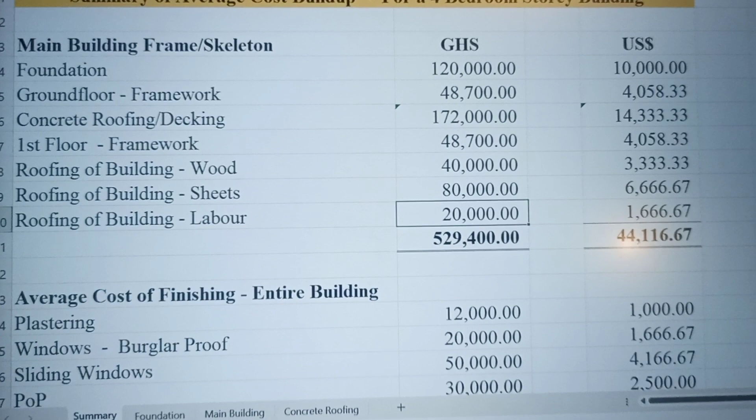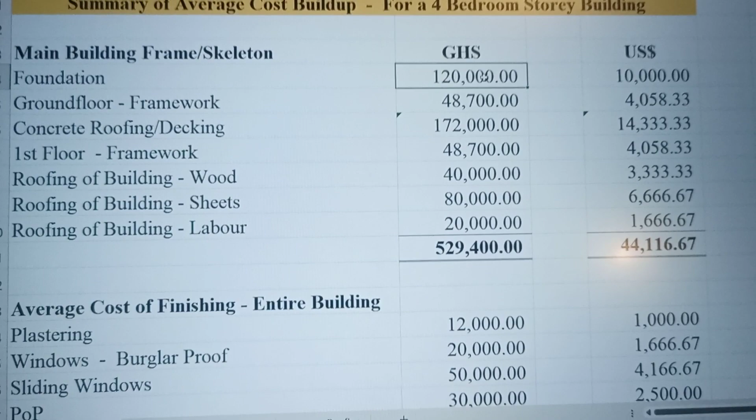Let's go through the spreadsheet. We start with the foundation. Here I have an estimate of 120,000 cedis, which is just about $10,000 using a rate of 12 to 1 to the USD. This foundation is for a two-story, four-bedroom building. Now what goes into that? We'll look at that briefly.

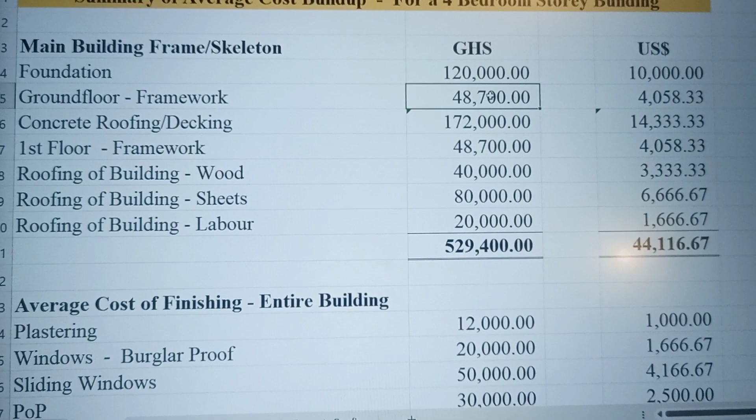Then we also have the ground floor framework. Here we look at the block work. After you are done with the foundation, you do your block work. How much is that going to cost you? As you can see, that is 48,700, just about $4,000.

Then we also have the concrete decking. This is the roof work, where you floor the first floor or the ground floor before you move to the first floor. That is 172,000. We'll look at the details briefly.

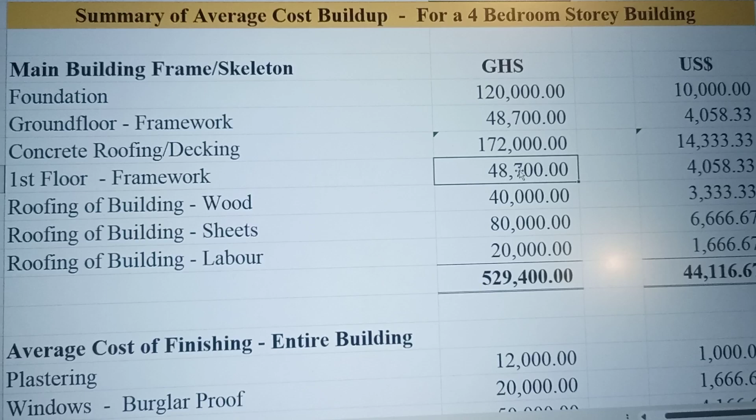Then we have the first floor framework. It's just like when you are doing the ground floor framework, the same thing. It's just the block work you are doing here.

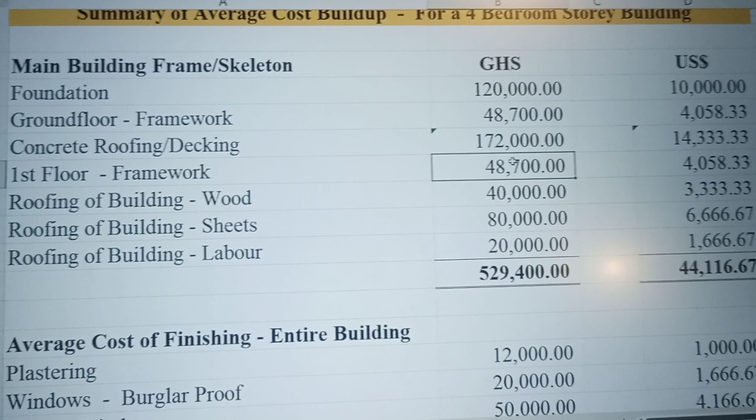Then we have the roofing of the building. This is where you have to pay a lot of attention. Here you buy the wood, you buy the roofing sheets, and then you pay for labor. There are other materials you buy, like nails and stuff. We have lumped everything together, and everything is coming to 529,000, you can round it off to 530,000 Ghana cedis. That is just about $44,000.

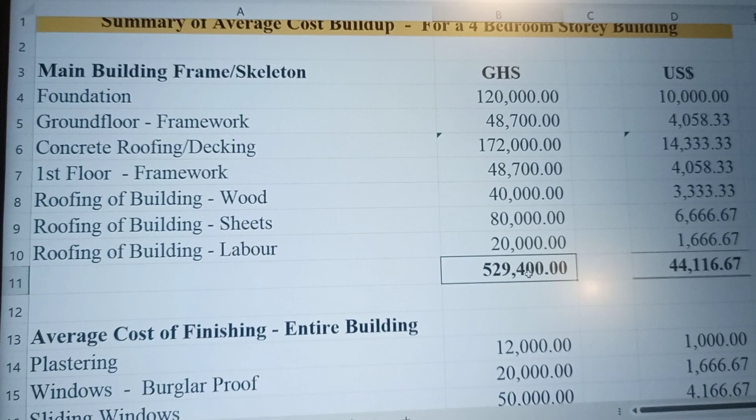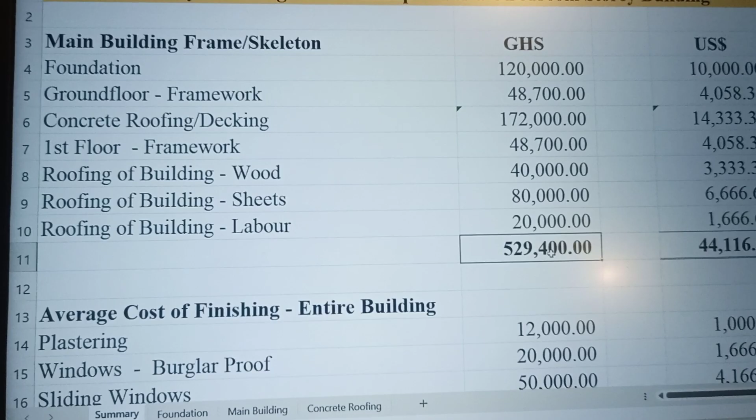So with 529,000 Ghana cedis, it is enough to get you to the framework. At this stage, you can see the building itself there, without the finishing. Let me recap. Here you see the main building standing there, but you will not see the finishing part of it.

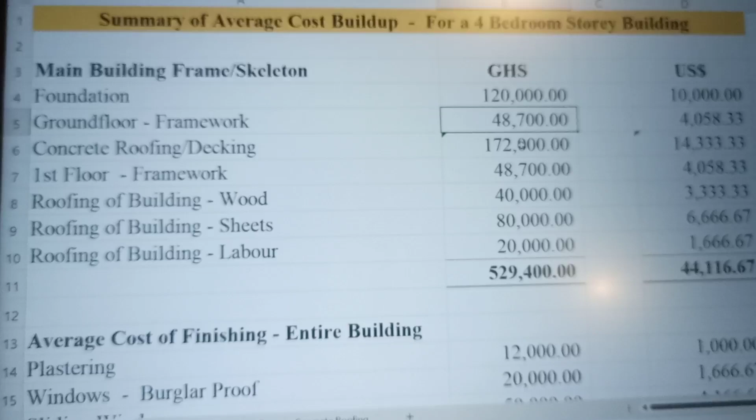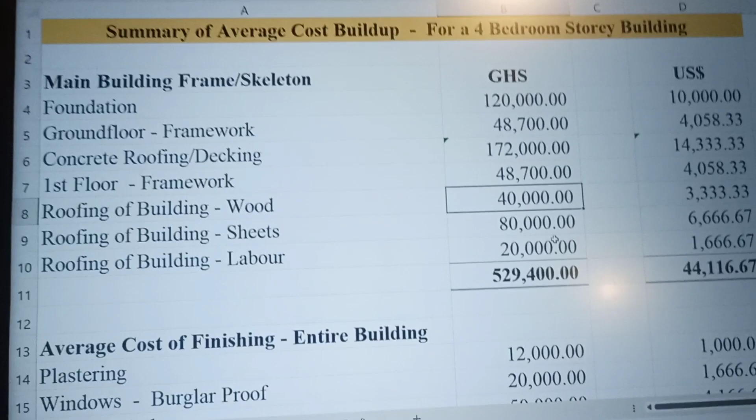So give or take, we have a foundation of 120,000, the block work on the ground floor of 48,700, concrete roofing or decking of 172,000, and the first floor of 48,700. So in case you are not sure and somebody wants to put up the house for you, you have a very good estimate that you can be working with, and make sure you pay attention to it.

So let's go through the foundation. That is what we have here. So the foundation is here. So what goes into the 120,000?

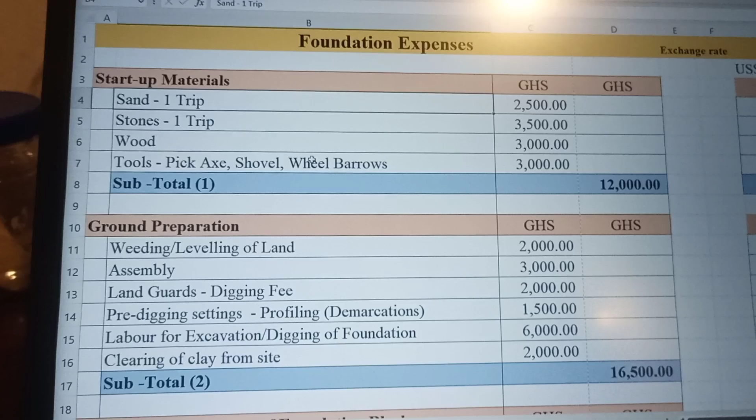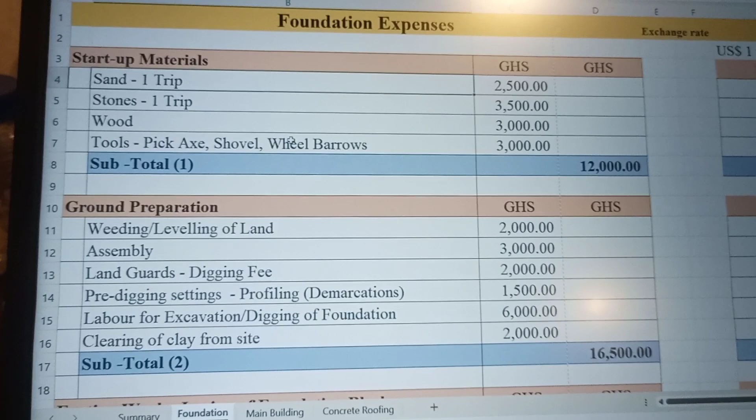As I indicated, when you want to start a building project, you don't need to save a lot of money. You can start with something very small. You don't need to have 50,000 or 100,000 before you start a building project. No, it is a gradual process. A lot of people have gone on retirement without doing anything. All you need is a genuine land, and we will talk about that in detail later.

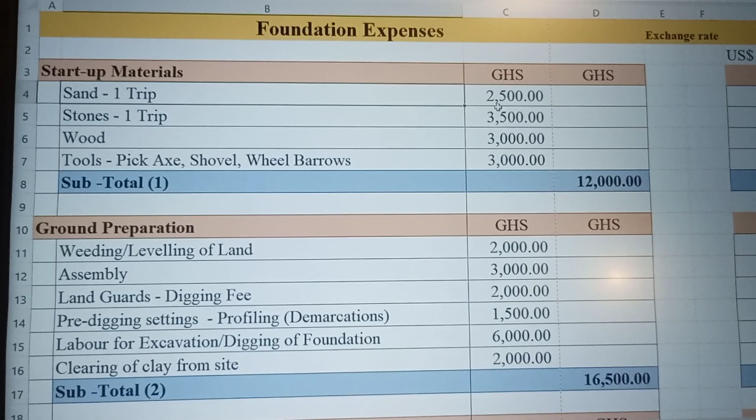Whilst you have the land available—this applies to those who have the land available—what you have to do is make sure you have some sand and stone on site. With 2,500 you can get a trip of sand, and with 2,000 to 3,500 you can get a trip of stone. Then we have wood and tools that you will use to do the digging.

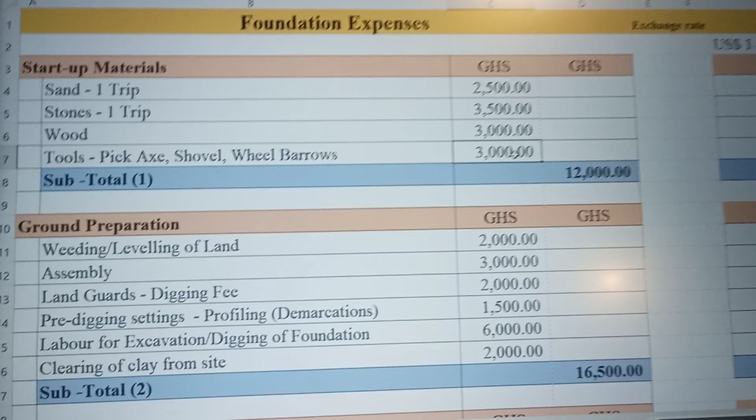Before you start the building, you are going to do digging. You are going to dig the foundation. There's going to be some excavation work, so you need a pickaxe, a shovel, and wheelbarrows. I have estimated that to be 12,000 cedis. If you don't have 12,000 cedis, you don't have to worry at all.

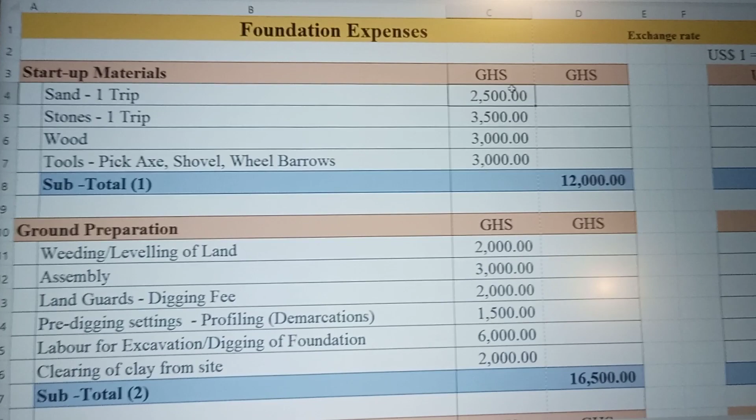All you have to do is buy the sand and the stones and put them on site. Go gather another round of money and then come again and continue. This time you can rent the tools, so instead of spending 3,000 on tools, you can rent them at a cheaper cost. And the wood, you can even rent some of it, since the wood will mainly be used for the profiling. So with 12,000, you are good to go with the startup materials.

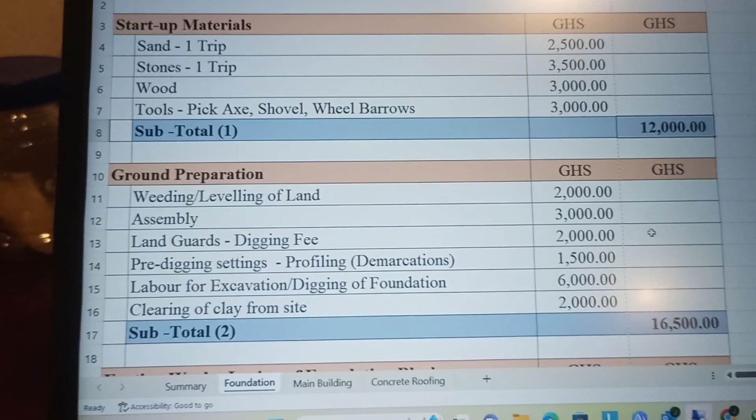Now let's continue. So then we come to the ground preparation. In the ground preparation, we have the weeding or leveling of the land.

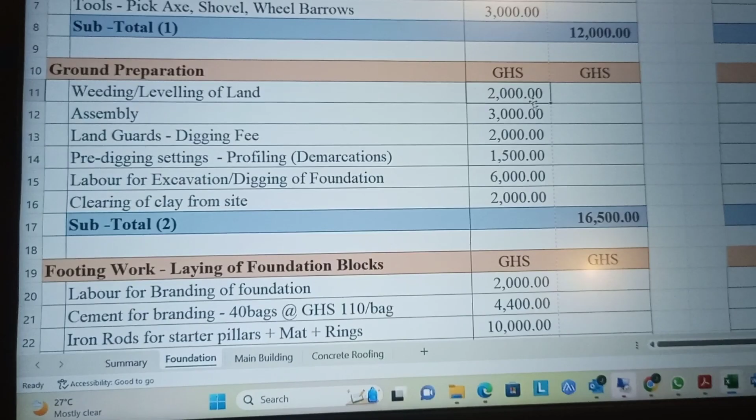So here you are going to get some guys to weed the land or a grader to level the land for you so that it will be easier to do the digging.

Then this is assembly. This is what you pay to the assembly that is in charge of the area. They will give you the building permit, so this money goes to them.

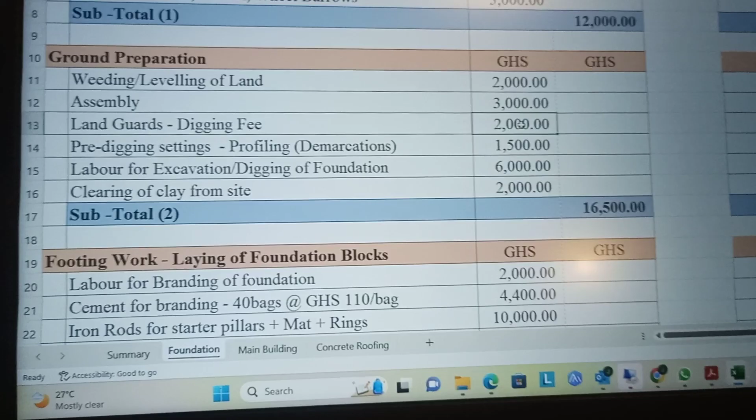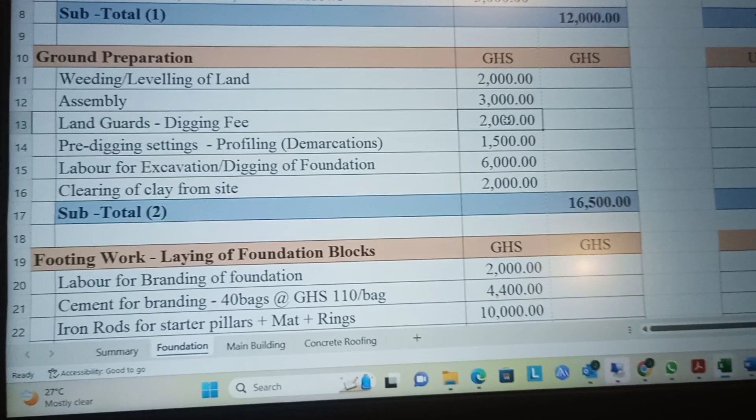Then in Ghana, you realize that there are land guards everywhere, even in areas that are developed. Before you start building, they will come all over you. If you don't sort them out, it will be difficult for you to build. So if you want your peace of mind, you make provision to cover them, and 2,000 cedis should just do that.

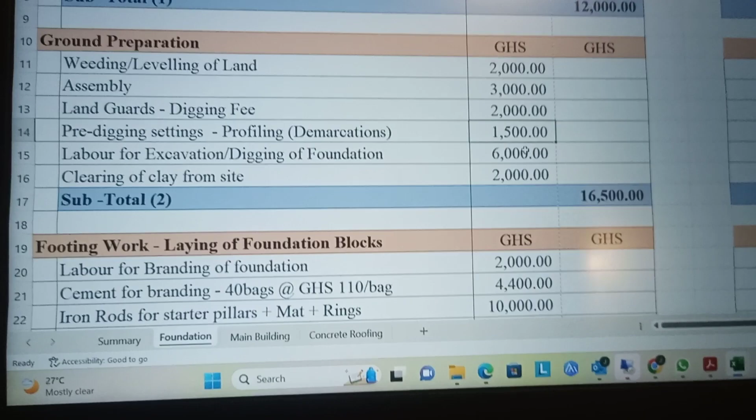Then we have the pre-digging settings. This is where the demarcations are done, where you do the lines. The lines are drawn for the rooms, where the rooms are, the kitchen is, where the hall is, everywhere. So there is a profiling that is done. You need to use wood, or you can use blocks to just do that.

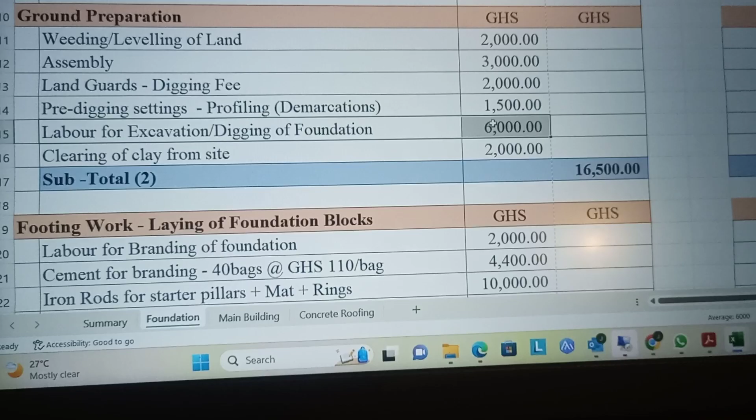You'll be fine. Then we have the labor, so this is where we do the digging. Labor for digging, and this is where the foundation itself is dug.

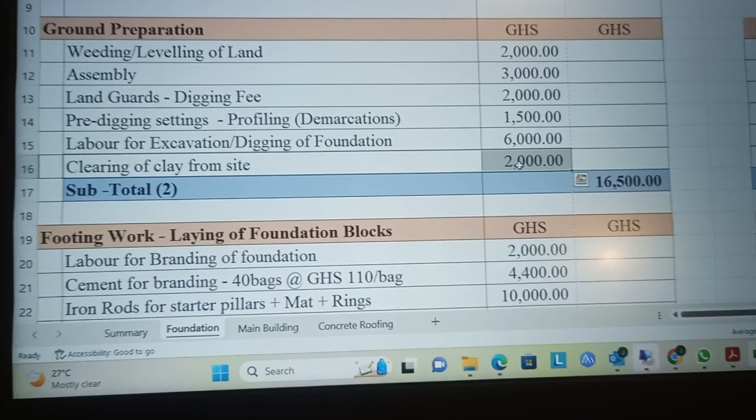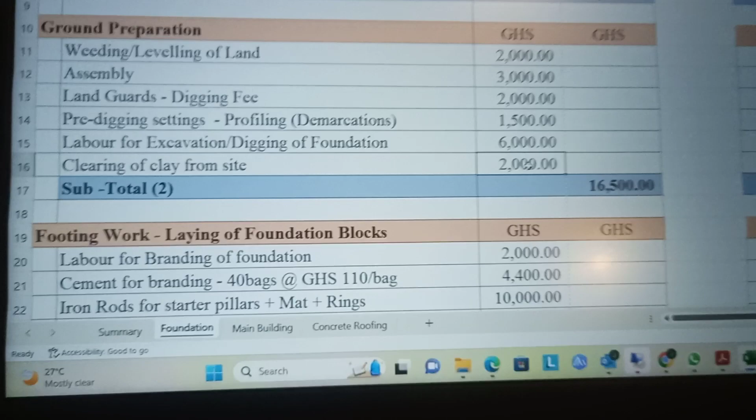And once that is done, please viewers pay very much attention to this. Clearing of clay from the site. If you finish the digging and there is clay on site, make sure that the clay is cleared from the site, because it can cause a lot of damage to your foundation. So please clear it from the site and fill it with gravels. The cost of the gravels is down there, so that gives you 16,500 cedis.

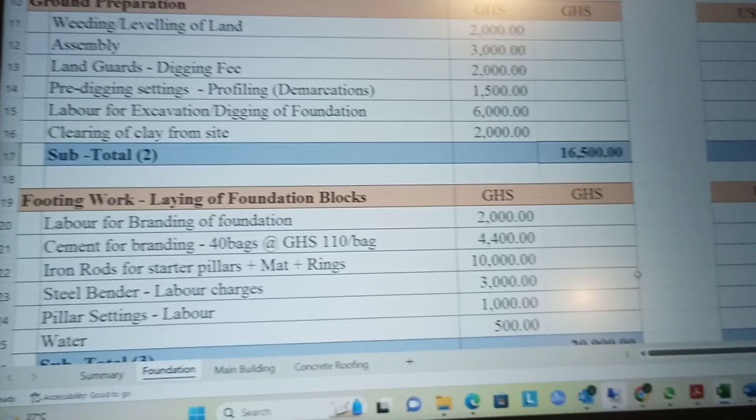So at this time, we have done our digging. We are ready to pour some concrete in the foundation, and then we are ready to go again. So now let's come to the foundation itself. Before we start laying the blocks for the foundation, we'll pour some concrete in the holes that we have done. I will show you videos of that.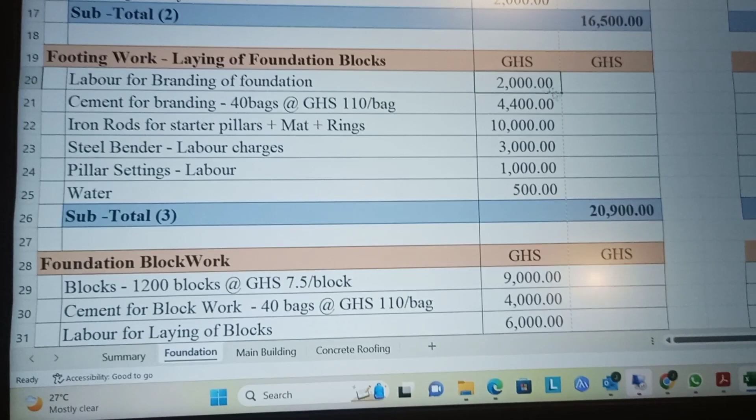So that is labor for branding. We call it branding, so you are branding the holes so that they can put the blocks on it. You can't put the blocks on the bare soil, you have to put it on concrete. So that is going to cost you some 2,000, and the cement you buy for that. Remember, you have already bought your sand, you have already bought your stones. So here you have the labor for the branding. You buy cement, and then you have the sand and the stones. They will mix the concrete and pour it in the soil.

Then after that is done, you buy your iron rods. You have to estimate about 10,000 cedis for that, because they will do some rings, they will do mat. I will show you all of that in due course.

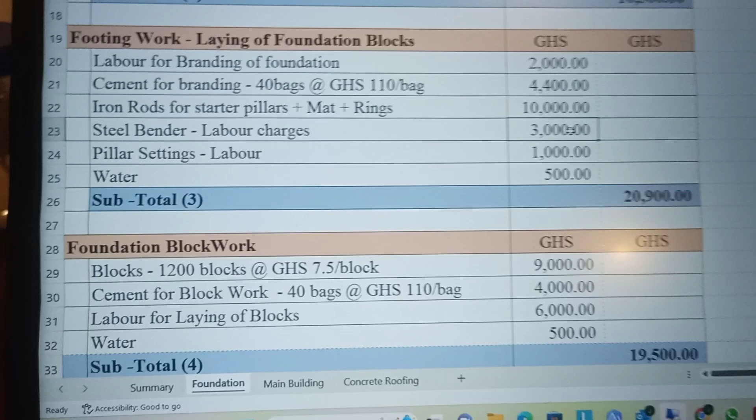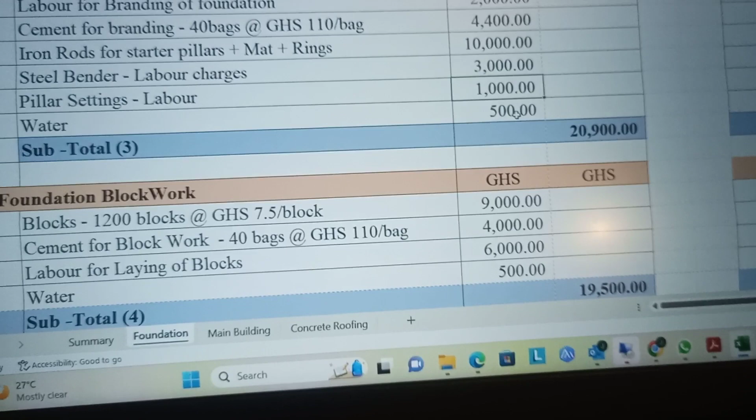Then what you pay to the steel bender, who is going to mold or put together the iron rods or the pillars. Then pillar settings, so somebody has to go and set the pillars according to the architectural drawing, and water for the branding. So that gives you 20,900 Ghana cedis.

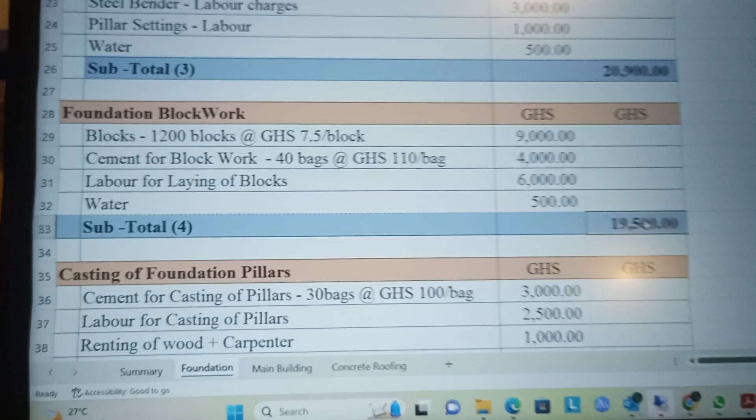Then now let's come to the foundation block work. Here in the foundation block work, you look at the blocks. With 1,200 blocks, you can do your foundation. So that costs about 9,000 cedis, just about $750.

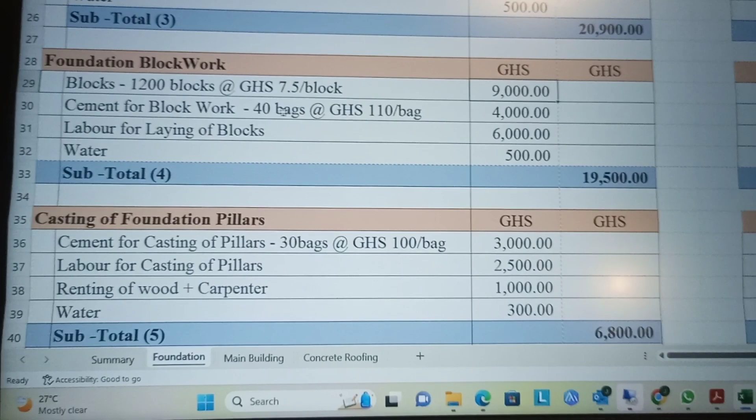Then cement for block work, that should be about 4,000 Ghana cedis. This cement for block work is the cement that they will use to lay the blocks for the foundation, so just make sure you understand that.

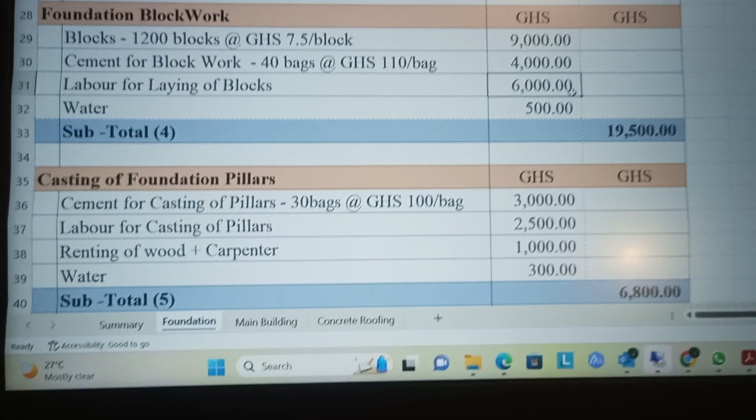Then labor for laying of blocks, you are going to spend about 6,000 Ghana cedis. A mason and a laborer, that is how much they will charge, 150 cedis each. So to lay 1,200 blocks, this is how much it's going to cost you, that gives you 19,500 Ghana cedis.

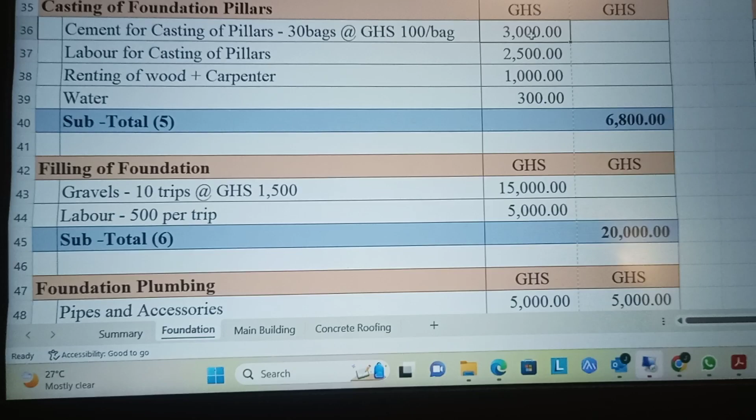Then once you are done, the pillars that have been put into the foundation, the concrete has to be poured on them. So you have to rent wood, and they would fix the wood by the pillars.

Once that one is done, the carpenter will do some work there. So renting of wood plus carpenter, everything, 1,000 should just do fine.

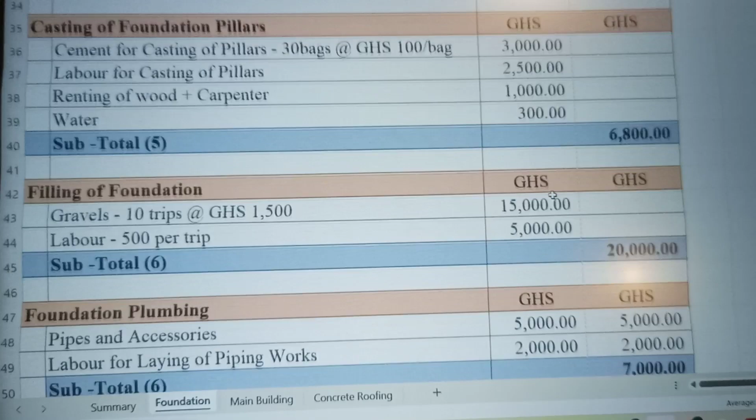The labor for the casting and the cement. You already have stones there, you already have sand you bought at the beginning. It will just do fine for the continuation, you don't need to buy additional sand and stones. So that casts the pillars.

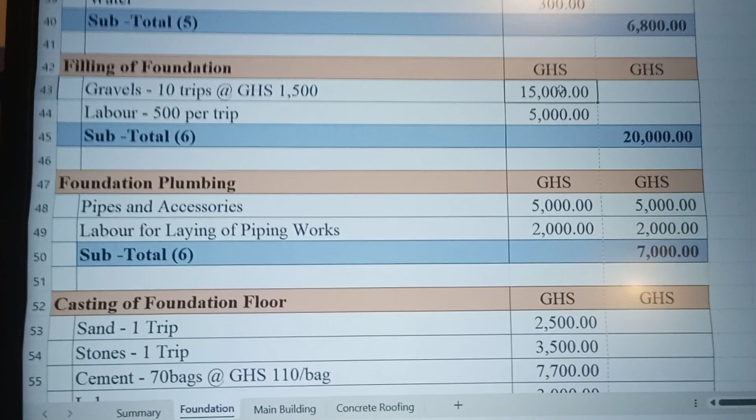Once that is done, you are ready to do your filling, so you fill the foundation with gravels. Remember, I told you that you will clear all the clay from the site. So once that is done, you are ready to fill it with gravels so that it doesn't cause the foundation to crack here and there. That one too, again, with about 20,000, you will just do.

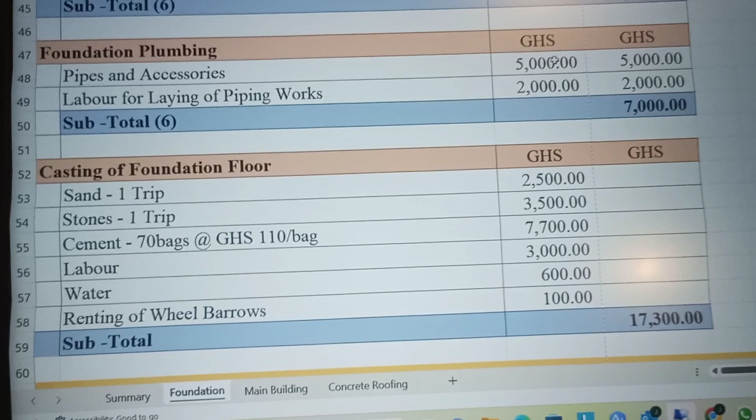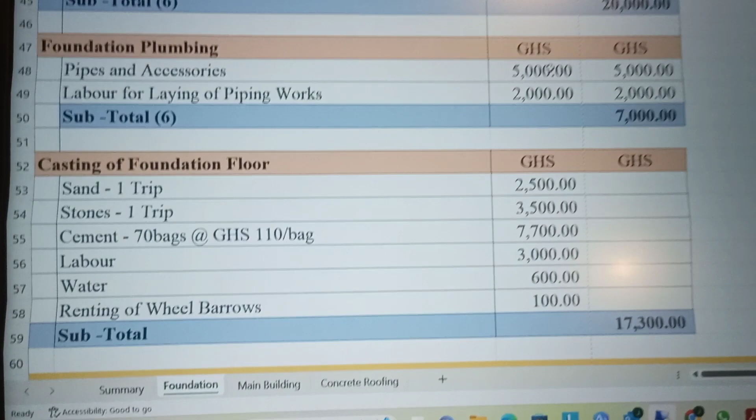Then you come to the plumbing works. So here, one before the foundation, we pour concrete on the foundation finally, so that you get the floor where you pass. You would have to put some plumbing works in there, some pipes in there. That will be the toiletries, the sink, I mean the wash hand basins and all of that. You do that. So that is 7,000 Ghana cedis.

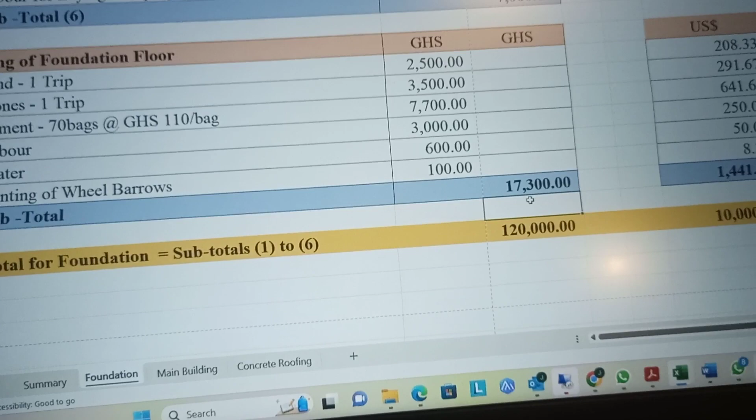Then you come to casting of the foundation floor. Here you will need additional sand, you need additional stone. You have to buy one each. Then cement for that, labor, water, and the renting. So you see that the total for foundation is 120,000, and that is just about $10,000.

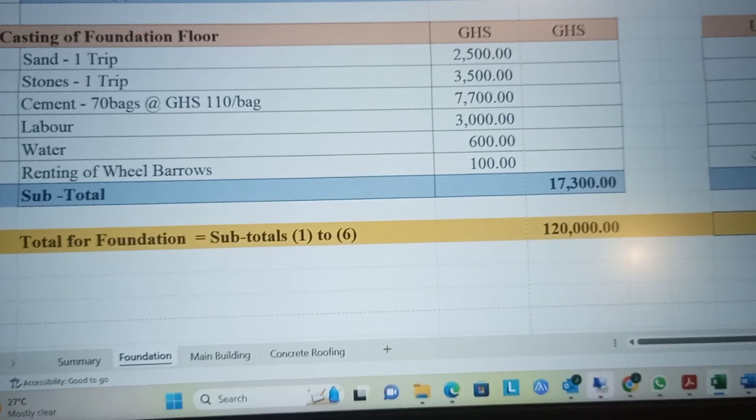So if you are overseas and somebody is building for you and quotes anything above this, then you have to be very careful, because in the end, this is just a 4-bedroom house. A lot of the money could go to waste.

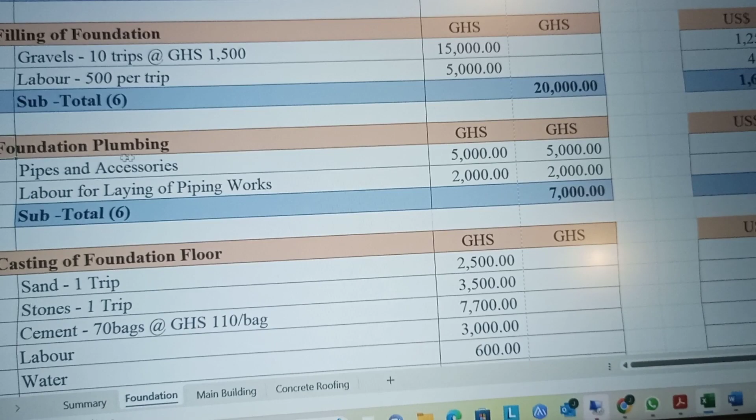So every step has to be explained to you. I have shown you the steps here. We have the startup materials, we have the ground preparation, we have the footing work, we have the foundation block work, we have the casting of the foundation, filling of the foundation, plumbing, casting of the foundation. So everything gives you 120,000 Ghana cedis.

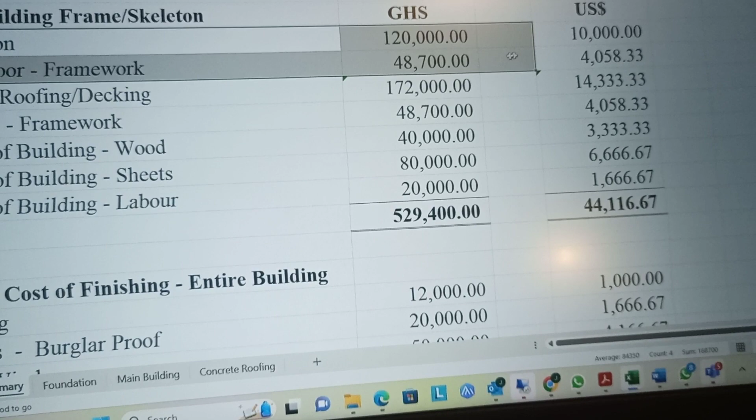So with this, we are now done with the foundation, which is what is here. That is the 120,000, the $10,000. So now let's continue. Now you come to the framework.

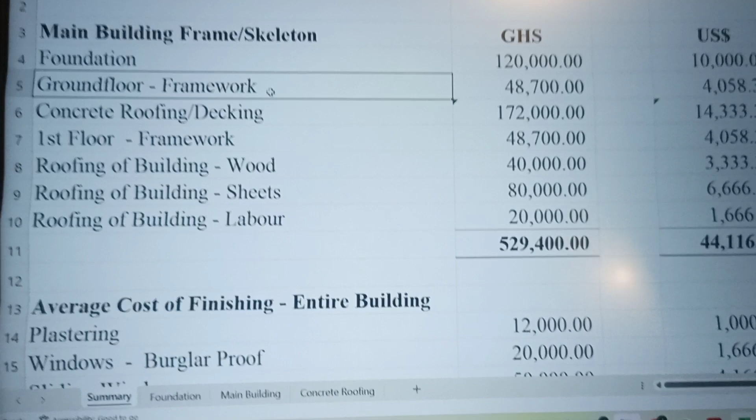This is where now you see the building, the ground floor. Here the block work is done. And as you can see, that is here. The cost of 48,000 is here.

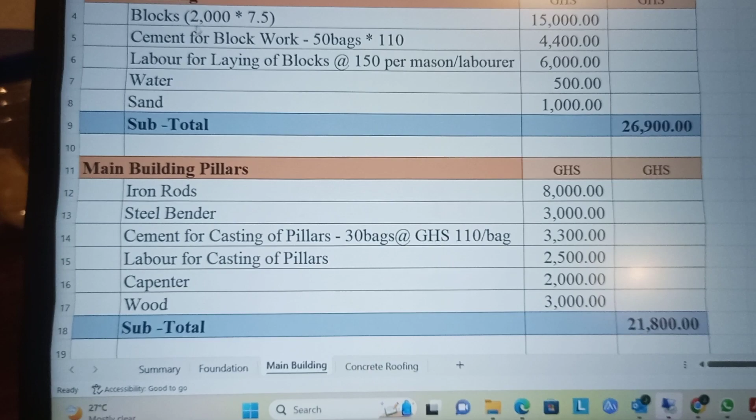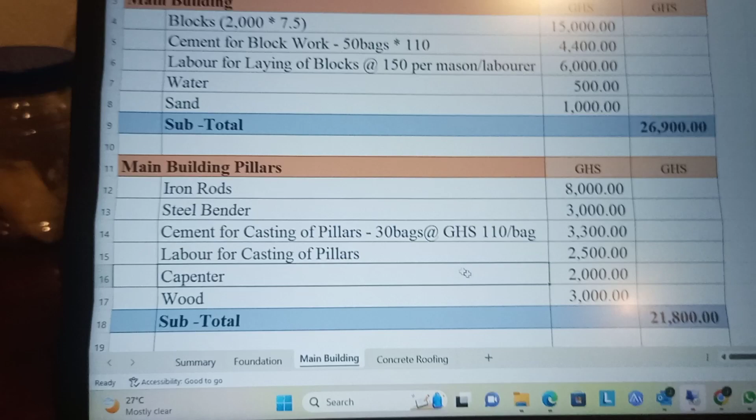So here you get your iron rods for the main block work. You get your iron rods for the main building is here. You have the steel bender, you have cement for casting of the pillars, labor for casting of the pillars, the carpenter, all that. Then the blocks that you will lay for the ground floor is there. Cement for the block work is here.

So let me just take a bit of time to walk you through it. So you buy about 2,000 blocks for the ground floor. It should be enough, 2,000 blocks for a 4-bedroom should be enough. So that gives you about 15,000 Ghana cedis.

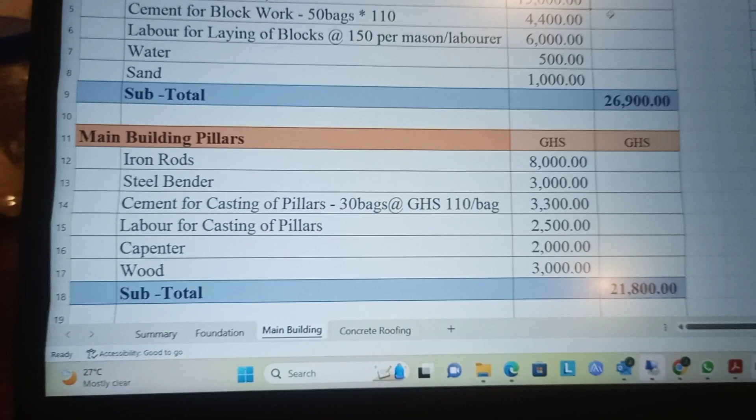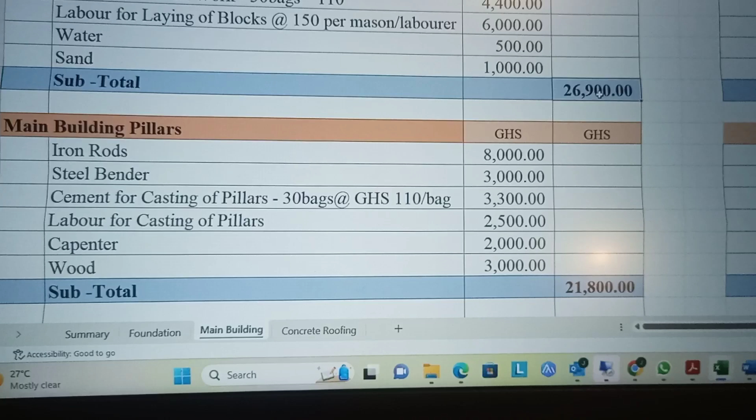You have cement for the block work. You have the labor for the laying of the blocks, here. The water, and then maybe an extra sand. That gives you 26,900. Then in the ground floor, you put some pillars in there.

So the starter pillars that you did during the foundation stage, you are going to continue with it. When you continue, you have the iron rods, the steel bender, blah, blah, blah. That gives you 21,800, so it comes to 48,700. That is just about $4,000.

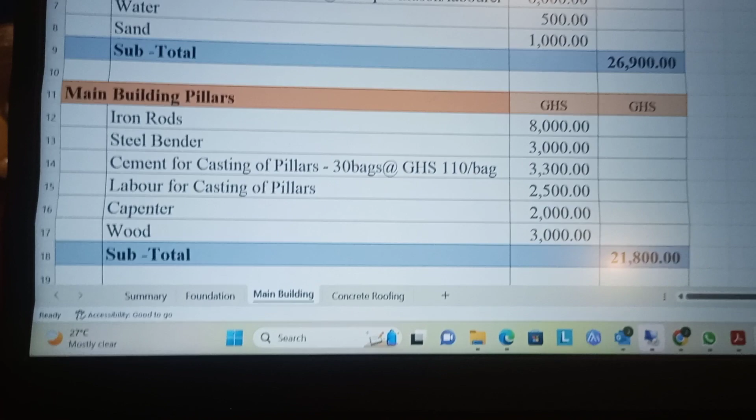So this one gives you the block work up to the lintel level, for the ground floor. By now, you are ready for the concrete roofing. The concrete roofing too, the cost is here. So the concrete roofing, let's go back to our summary page. Now you've seen the ground floor work. Now let's go to the concrete roofing.

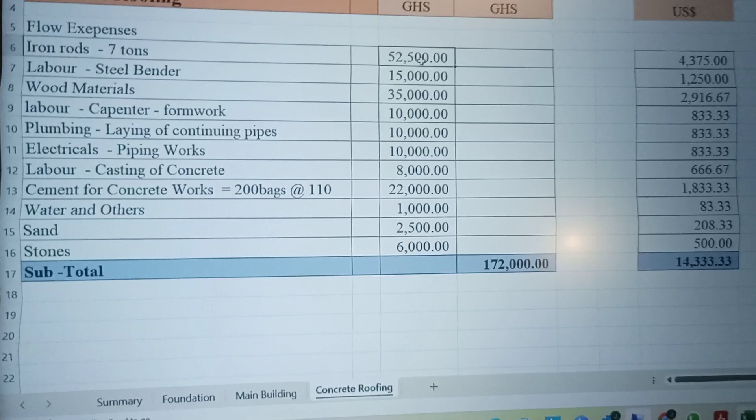So here, you buy iron rods. You have to buy about, if you want a quality job, about 7 tons to get a very good job. The labor, normally they charge about a third of it. So let's estimate about 15,000 Ghana cedis.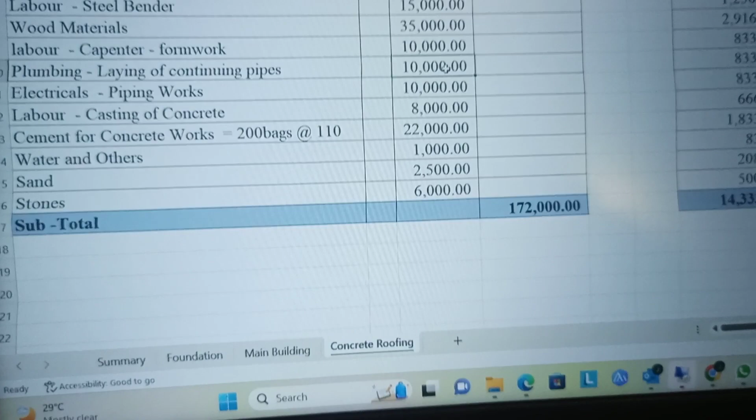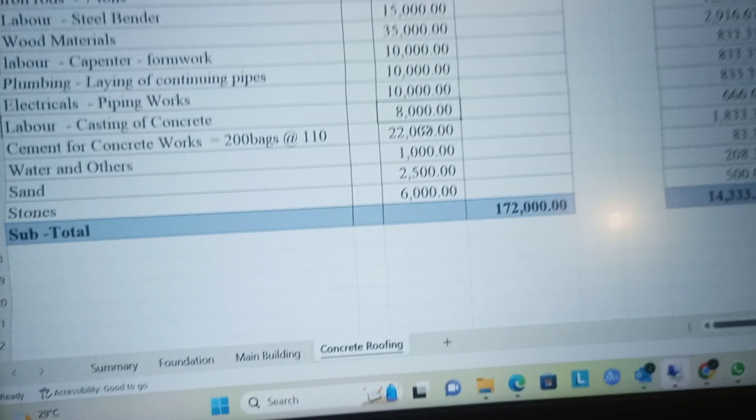The wood materials, you buy wood for the decking. Then you have the carpenter who is going to do the form work. You have plumbing, where you lay pipes for the continuing pipes, because you have to do that before you can actually cast it. Then we have the electrical pipes, so they will put the electrical pipes in the floor, you have to buy that. Then labor for casting of concrete is here. Then cement for concrete works about 200 bags, you need about 200 bags to ensure you get a very good job done.

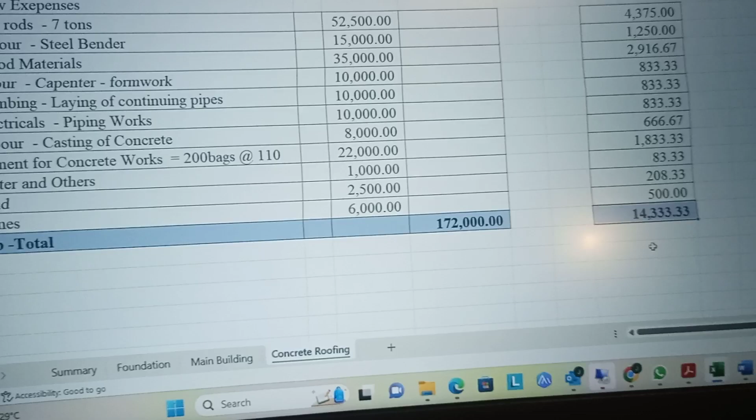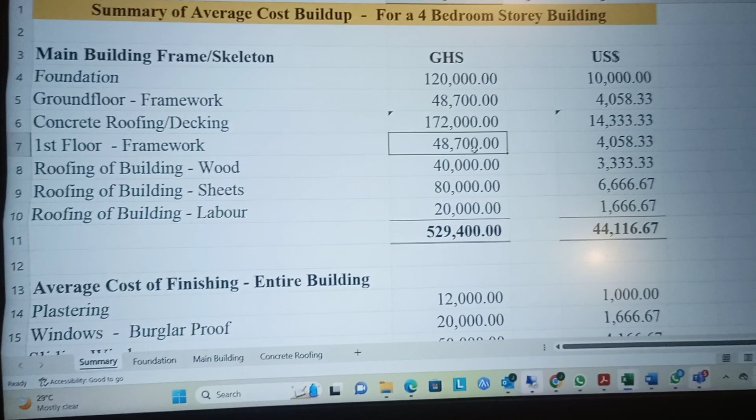Water, sand, extra stones - so that gives you 172,000. So you need 172,000 to do your decking. If you are lucky, you can do it for 150,000. That translates to about $14,000. So let's go back to our summary sheet. So that is what you have here, 172,000, that's $14,000. Then you have the first floor framework.

You have the roofing of the building, as we walk through. So with about 529,000, as I said, you should get the structure there. Now, in the next video, we are going to talk about the cost of finishing. But with the structure, 529,400, that's about $44,000, can do a very nice 4-bedroom story building for you.

So this 4-bedroom story building, you have one room downstairs, or maybe two rooms downstairs. Maybe you can have a master bedroom downstairs, you can have a room - that's the room for the house help. You have a very big kitchen, a very big dining area, a hall, all in a half plot. So we are looking at a half plot of either 70 by 50 or 35 by 100 feet. It will just do fine, and you have enough space to park at least 5 cars.

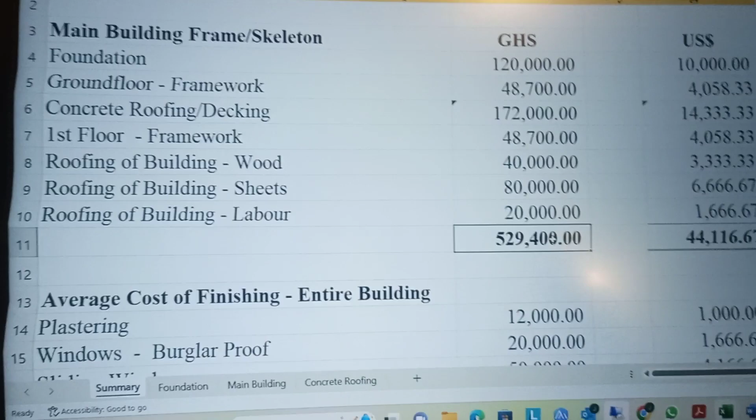So this is very important. You need to understand these steps so you know that you are on track and you know how you can structure your finances. I will do a video where we look at how you can finance some of these projects with maybe a combination of your own savings and loans. As I said, you don't need to save tons and tons of money before you start a building project, you can start it gradually.

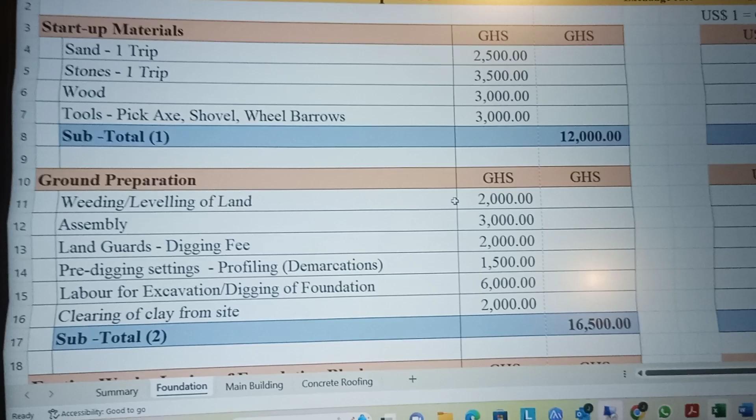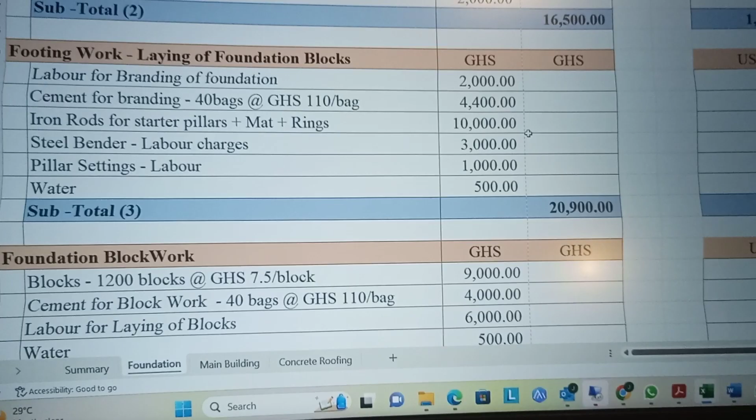As you can see from the foundation, there are a lot of things that you can do gradually. So you can buy the sand, you can buy the stones, put them on the sides, and you can do the rest later. Some of the things here, you gather about 10,000, you can go and start. Before you know it, you have finished the foundation, because a lot of the things you can do gradually. You can take as many years as you want, you can take 5 years, you can take 10 years. You would by all means get to the finishing line.

One thing about building is this: the most important thing is that you have to start it. When you start, you would realize that some energy would come, the spirit of building will enter you, and before you realize, you start building aggressively. Wherever you can get money, of course genuinely, not stealing, nothing - you can get money to put into the building project, you will do. So my advice is this: a journey of 1,000 miles begins with a step. So you just have to begin the journey, and before you know it, you are done.

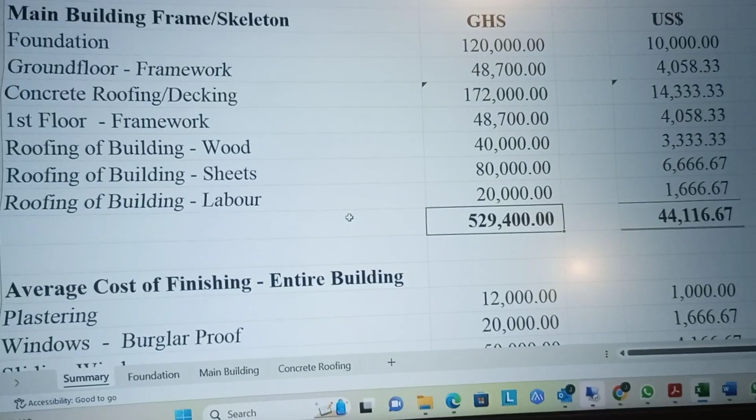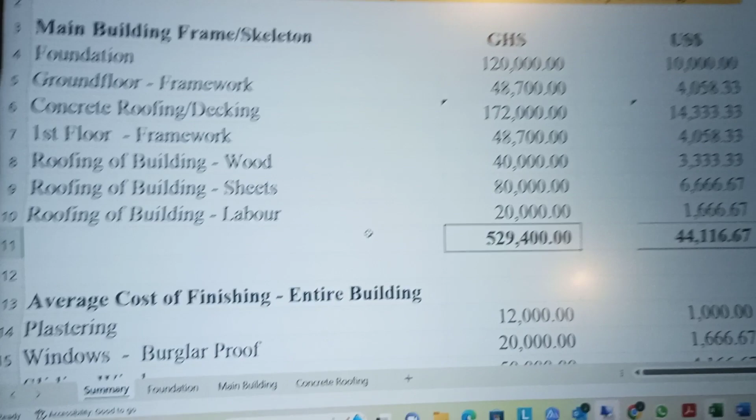See you in the next video where we talk about the finishing and the steps that I have enumerated, a video linking all these numbers to the video. The most important thing is to give you an idea of the cost of the building, what stages we go through, and what you need to know. So you can also understand it when your foreman comes for money for a stage, you know what the money is going to be used for. And then you will not think that they are shortchanging you, or have any doubt in your mind what is going to happen. And for some of the stages, if you are not sure, you can request for a video to see how it is done, to be sure that it's in line with this estimate we have given you.

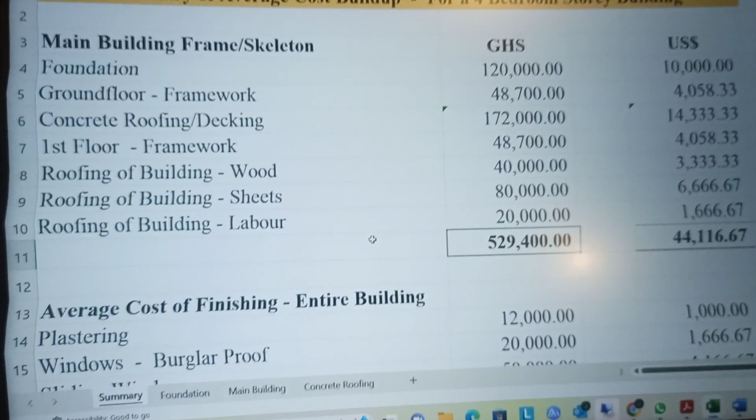As I said, I'll have a video for all of those things, number one. And then number two, we will link the video to the numbers so you can make sense of all of them. Thank you very much.